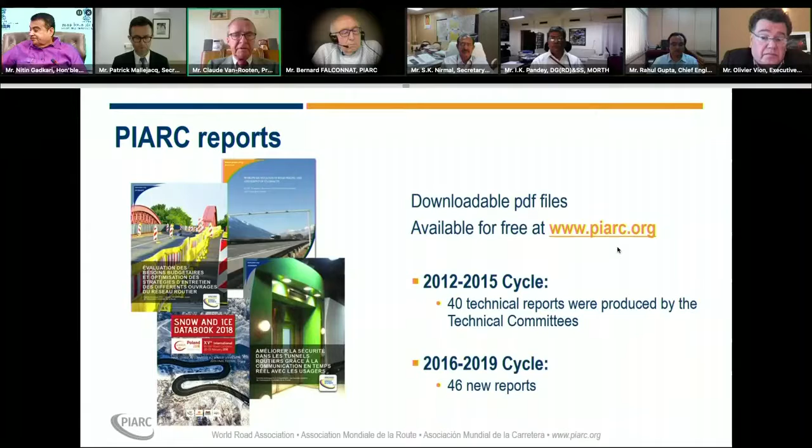We have reports of the past, and you see some of them here explained, 40 in one cycle, 46, and we are of course working on even more reports in the actual cycle. Next slide, please.

Important is, of course, to exchange and to have the possibility to present knowledge to the countries who want more. And that's why exchange of knowledge with and in low and middle income countries is quite important. We organized 22 seminars and 22 workshops in the former cycle. We have that all online on the website too. And of course, now we have some difficulties organizing them all in person, but webinars are a fantastic solution to go on with our knowledge exchange. Next slide, please.

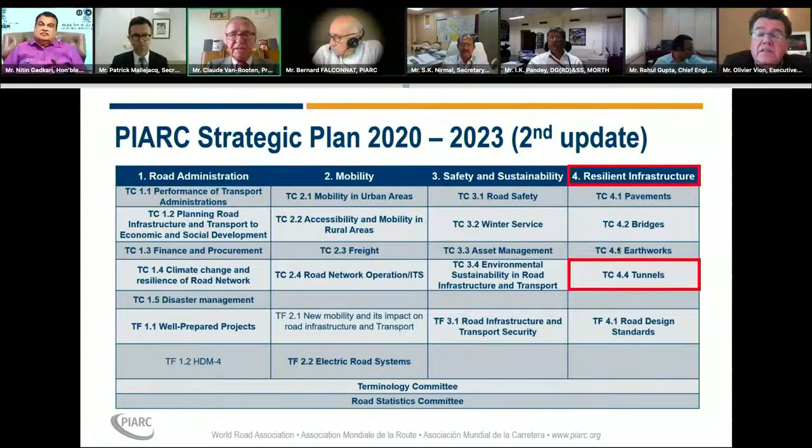We work based on a strategic plan after consultation of all our members and also partner organizations, because we try to have our work really focused on the most important topics for the whole world. And you see in the fourth column, the topic of today, tunnels. Next slide, please.

But of course, within that strategic plan, we have horizontal issues: climate change, resilience, road safety, innovation, and since one year, the pandemic of course. This is an issue where we have a response team quickly set up under the leadership of Patrick Mallejacq, working very hard about that. Next slide, please.

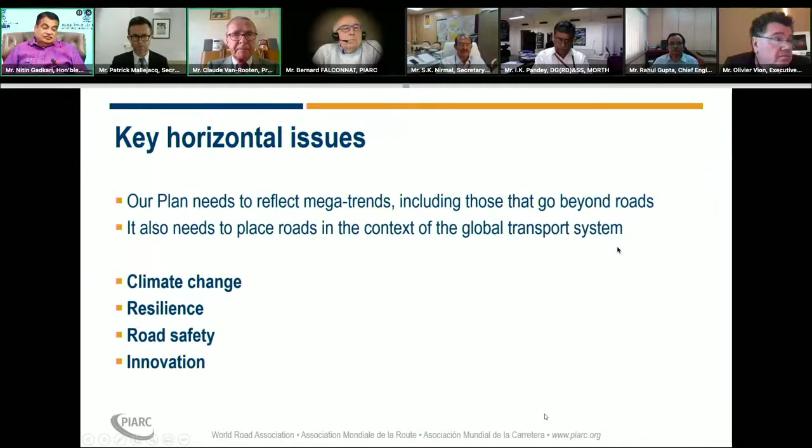Our work is led by Ingo Kaudinya about tunnel operation.

Merci, thank you. I don't know why the sound has been cut off. I am really sorry for that. I did not do that by myself. I hope you saw a minimum of information from the slides.

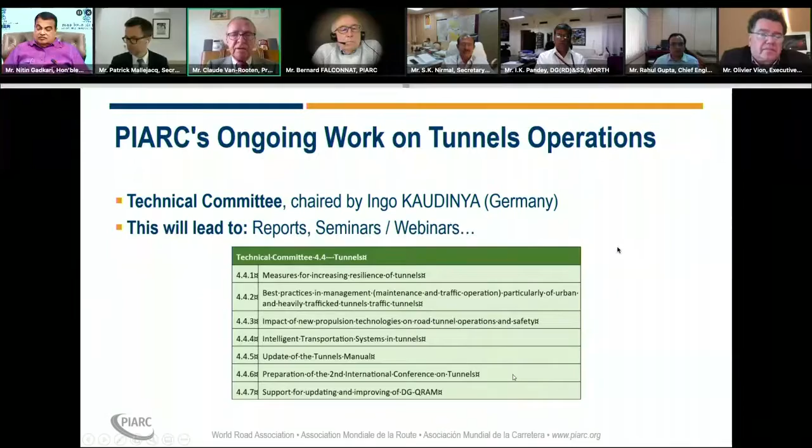Now I'm talking about the ongoing work on tunnel operations led by Ingo Kaudinya, who you are going to hear in the next sessions. Next slide, please.

Tunnels. The technical committee has 130 members from 40 countries. Not every country is a specialist in all the technical committees we have set up. The work is organized in committee meetings and 7 working groups and task forces, and I would like to thank them all for their tremendous continuous work about that. Next slide, please.

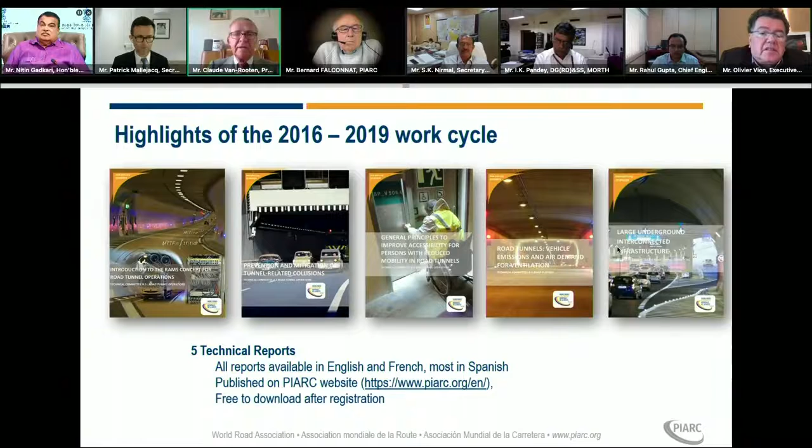Highlights of the last cycle. You can find all those reports again on our website, but it's important that you know it is almost a continuous work. Next slide, please.

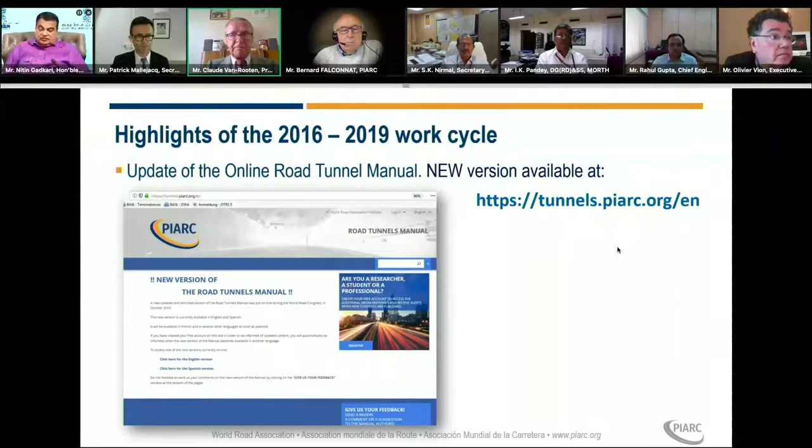Important also is the update on the online road tunnel manual. The new version is available on the website too. That online manual is a new method of presentation of our work that is very accessible and helps you go on your own timing and speed to have all the information about what is happening in the whole world. Next slide, please. I am concise to respect the timing, of course.

The next PIARC events: don't be afraid of the World Winter Service. I know that in India it's not so cold, however in the mountains probably well, but it's also the Road Resilience Congress. It will be virtual because we cannot organize it further, taking into account that many countries still in February will have limitations for traveling. But it doesn't prevent us from organizing a very important Congress. And in a certain sense, it gives more accessibility to many people from the whole world, for perhaps a cheaper price, because you don't need to travel to it.

We will have a second PIARC International Conference on Road Tunnel Operations and Safety in Granada in October 2022. And don't miss, of course, what we hope will be a real Congress in Prague in October 2023. Next slide, please.

India, as I said, was a founding member of PIARC in 1909. We have an esteemed member from India in our task forces on road design standards, and also on the Road Tunnels Committee. India is very welcome to appoint more experts in PIARC technical committees, to propose to host PIARC seminars locally as you do now, and so on.

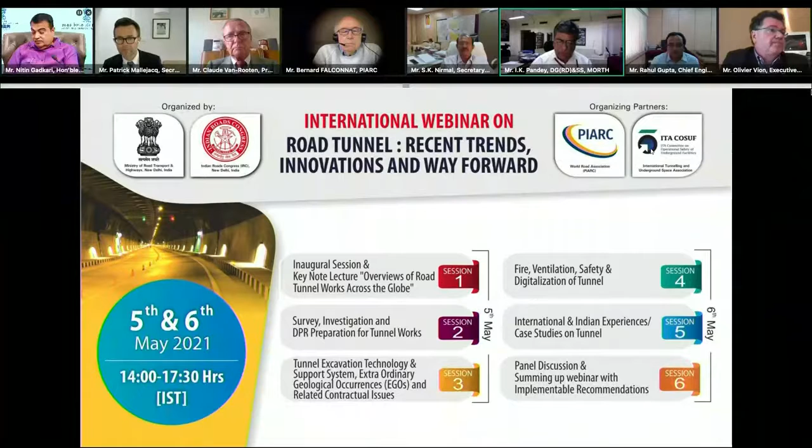I am really grateful to the Honorable Minister for gracing this occasion on the webinar on road tunnels, besides his busy schedule. I would also like to thank Indian Roads Congress, World Road Association, and International Tunnelling and Underground Space Association for coming together on this platform in organizing this international webinar on road tunnels, recent trends, innovations, and way forward.

Our ministry is mandated to develop a sustainable, safe, and reliable national highway infrastructure to achieve enhanced all-weather connectivity for fast-paced socio-economic development in the country. The construction of tunnels becomes imperative in mountainous areas where the surface transport network remains closed for a major period of the year due to snow, avalanche, etc.

Therefore, our ministry is focusing on development of tunnels on national highways in hilly and mountainous terrain for providing all-weather connectivity in inaccessible, remote, and strategic areas. I am grateful to our Honorable Minister, Road Transport and Highways, for directing us to specially create a separate tunnel zone in the ministry to address the problems being faced in tunnel projects in the country.

So the global output for tunnel and underground space construction, for the year 2019, is 125 billion euros, compared to 86 billion in 2016. That means growth of around 7 to 9% per year, which is 2 times more than global construction growth. So it's very important to show that tunneling is booming and that there are many, many projects all over the world.

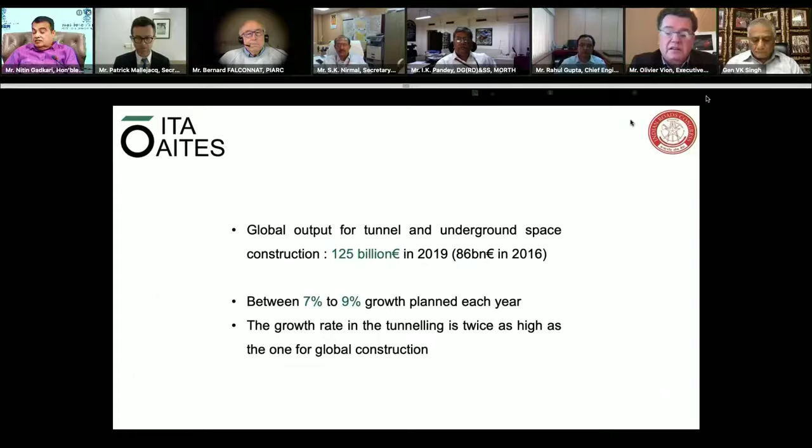If you see this graph, this is the tunnel construction by output in million euros. When I say Asia, I mean all Asian countries outside China, because China by itself is more or less 50% of all tunnels built in the world. So the figures show that Asia, China, and Europe are the big markets for tunneling. Then you have the Middle East, Australia, South America. So it shows anyhow that this is something very important.

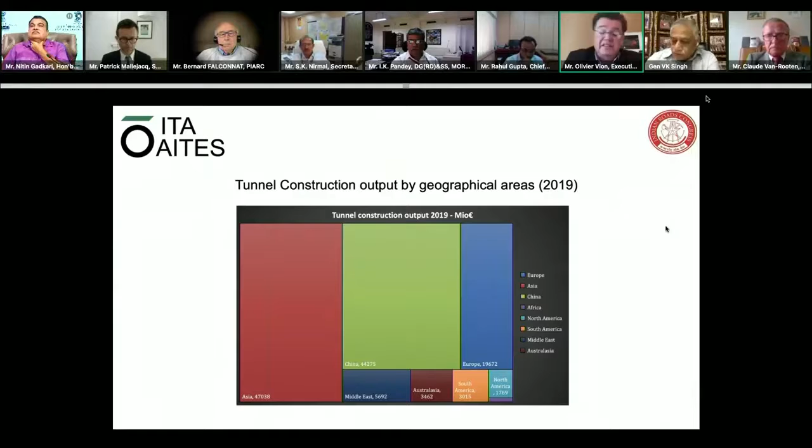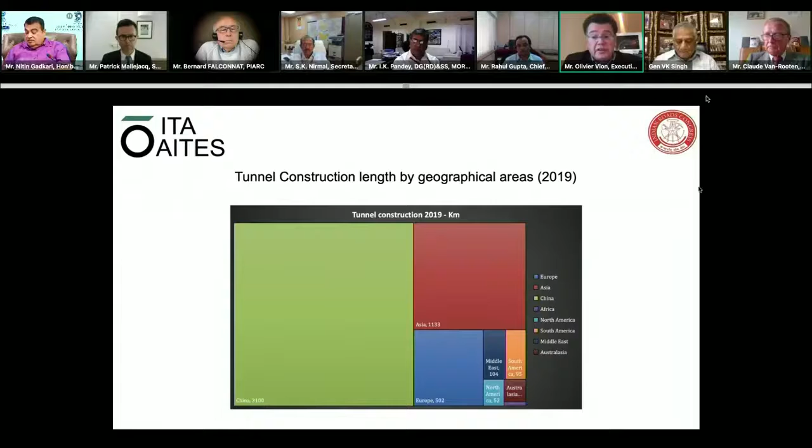Then in terms of kilometers, China is really the biggest, because of the 5,100 kilometers of tunnels that were in construction in 2019, 3,000 kilometers were being built in China, 1,000 in the rest of Asia, and 500 kilometers in Europe. So this is very important to be seen.

In Europe, for instance, you have Turkey, which is now the biggest market in Europe, followed by some countries with the same amount of tunnels, around 40 to 50 kilometers of tunnels excavated every year: Austria, Germany, Italy, Norway.

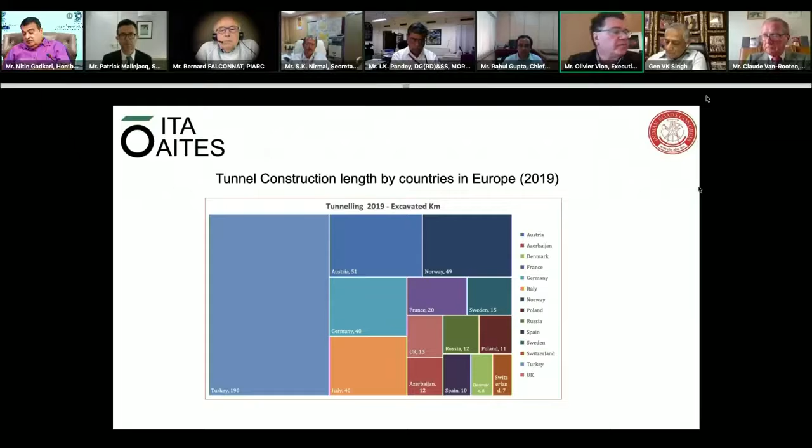Of course, the figure is different when you look at output versus kilometer, because not all tunnels have the same value. Mostly, road tunnels are per kilometer cheaper than metro tunnels, and therefore the countries building more road tunnels might be first in kilometer, but not first in output.

If I take Asia, in kilometers: China 3,000 kilometers of tunnels, Japan 800 kilometers, India 130 kilometers, and then other countries of Asia in kilometers of tunnels excavated during the year 2019. So these are the real kilometers excavated during 2019.

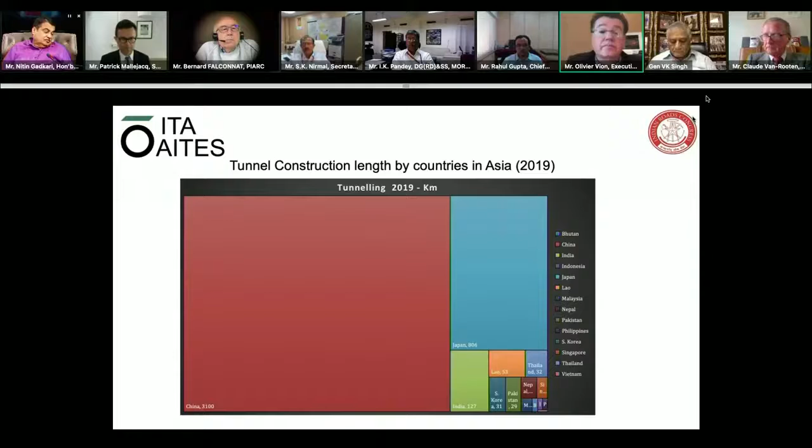As you see, the breakdown by use of tunnel is between metro, rail, road, and others. Road tunnels are the majority of the tunnels being built in the world.

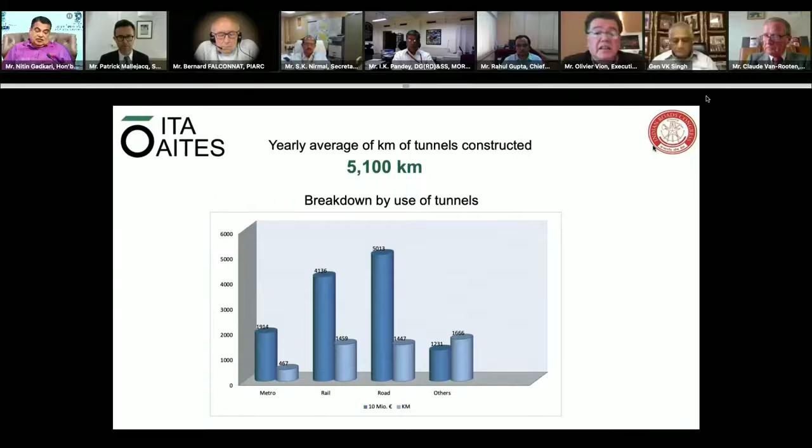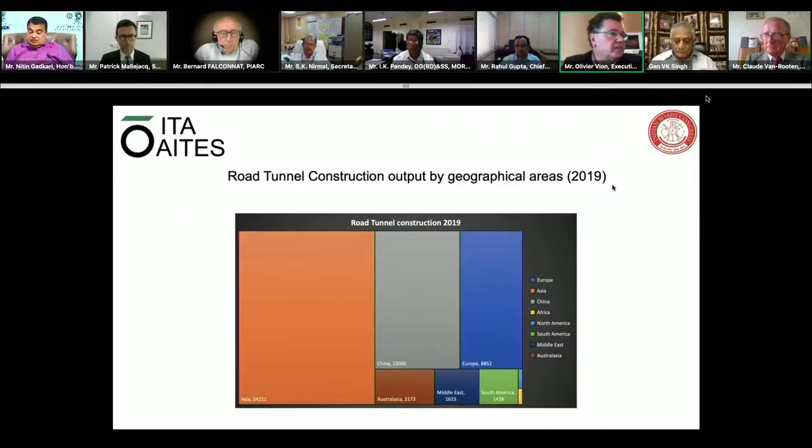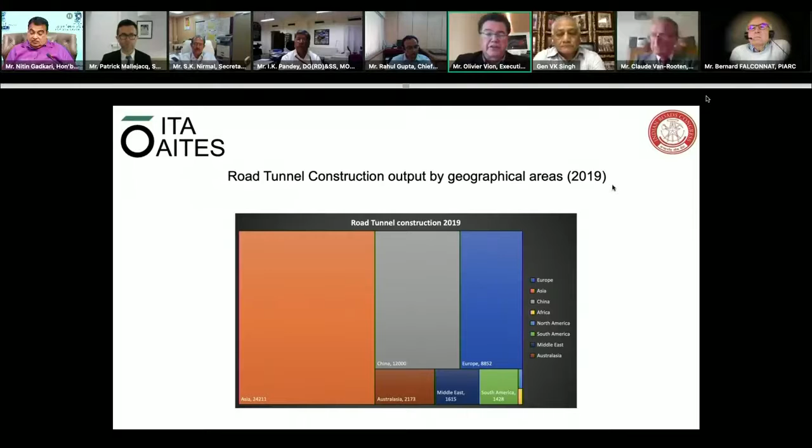If I go now more deeply on road tunnels, taking the same thing, China, Asia, Europe are first with 800 kilometers of road tunnel in China, 350 in Asia, and 225 in Europe. By output, Asia with 24 billion, China, Europe, Australasia. So the global market of tunnels, road tunnels or all tunnels, is dominated by China and Asia, which are growing countries with the most people demographically, meaning that the needs for tunnels and infrastructure are most important here, and it's good. They need to build infrastructure, and among the infrastructure being built, tunnels represent a great majority of projects.

That was a view of the reality of the year 2019. If we go now to projects in planning or study, we are more or less the same, even though the time frame between the start of planning of a tunnel and its completion is much longer in Europe than in other countries, specifically China. Sometimes when you ask Chinese authorities what their plans are, they can give you the plans for the next 3 years, which already represents a big amount, but they do not have longer term plans. For us in Europe, we have tunnels that have been in the planning phase for the last 25 years, for which construction has not started yet.

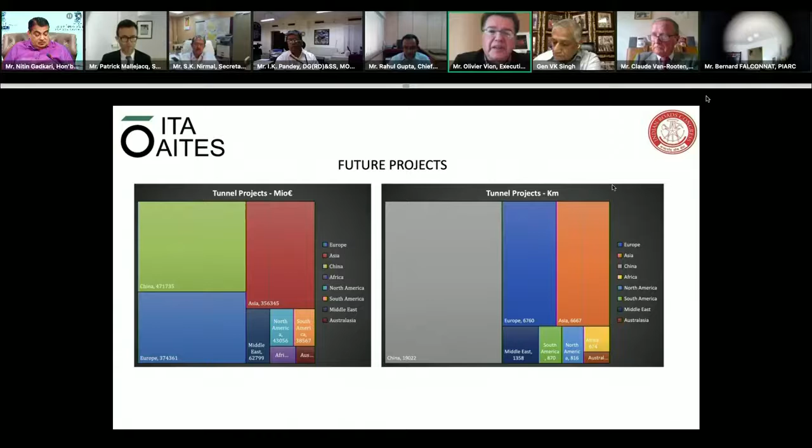So we have many tunnels in planning. That doesn't mean they will come in the next 5 years, whereas in Asian countries, specifically China, when you have a tunnel in a planning phase, that means that in the next 5 years it will be completed and commissioned. We sometimes would love to have this in Europe, but we have many other things to cope with, which unfortunately doesn't bring us to this figure.

It's the same, even though in the planning phase, probably because it takes longer to plan and the studies are longer, you have more rail tunnels in planning than road tunnels. Also because a rail tunnel means you are on a railway line, and a railway line can be operational only when it is finished. Sometimes with road tunnels, you have an existing road and you replace part of it with a tunnel to shorten the time, so you can act more quickly on road tunnels than on rail tunnels.

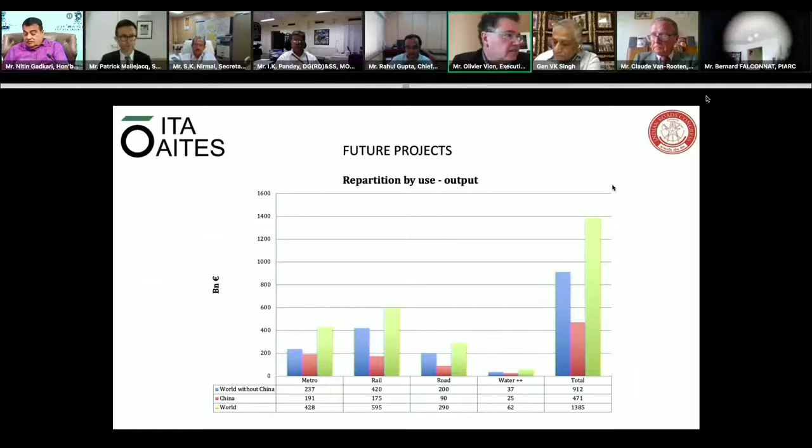Then I've tried to take some examples of road tunnel projects from the last years. You may know that the International Tunneling and Underground Space Association organizes awards every year - we will start the 7th edition this year - for the main projects, big projects, but also innovative projects. I've picked up some of the road tunnels that have been presented, either winners or finalists of these different awards, in order to show a variety of road tunnels being built in the world.

The first one is in Norway. As you know, the coast of Norway has a lot of fjords, but in the past you could go only by ferry, and they decided to build tunnels under the fjords, creating fixed links all along the coast. One of the big projects was the Ryfast tunnel, linking the city of Stavanger to the region of Ryfylke, with more than 50 kilometers of tunnels, including 40 kilometers of subsea tunnels.

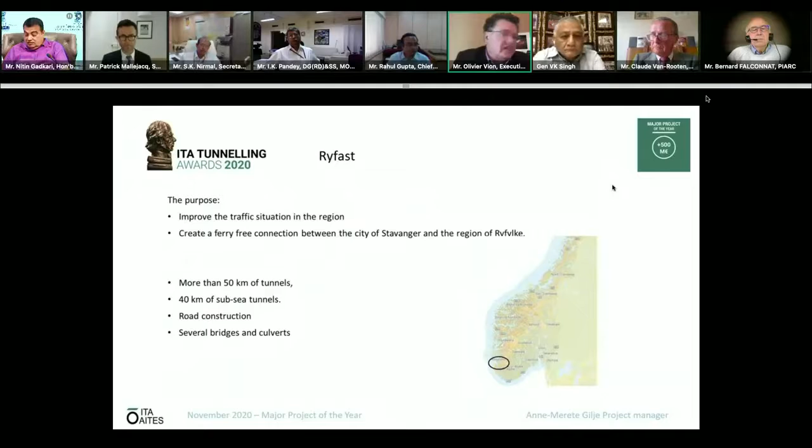I don't know if you see it well, but there are tunnels going all through there, with a tunnel going back on an island, and so on, sometimes with up to 6 deep tunnels. That's very impressive - to be able to build such a continuity of tunnels and undersea tunnels.

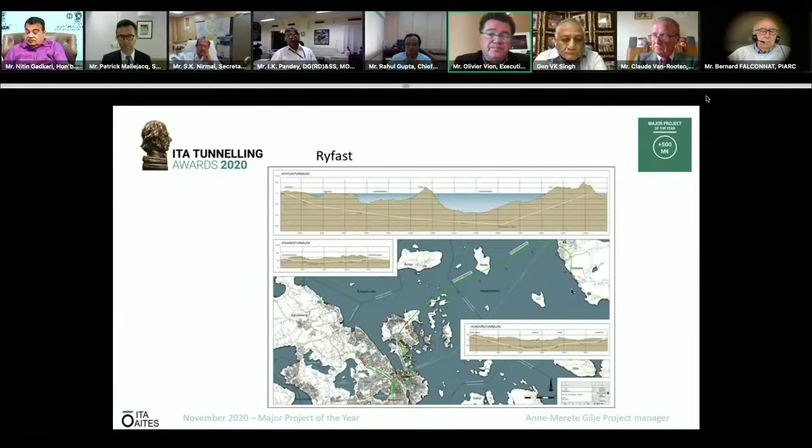It has been built by drill and blast with probe drilling and advanced drilling, because survey drillings made from boats, from the surface, are much more difficult to operate than when you are on land. So you need really advanced probe drilling and pre-grouting. Of course, you have something like 50-60 meters of water, so you need to be sure you are not going to have leakage, otherwise it's very difficult to cope with.

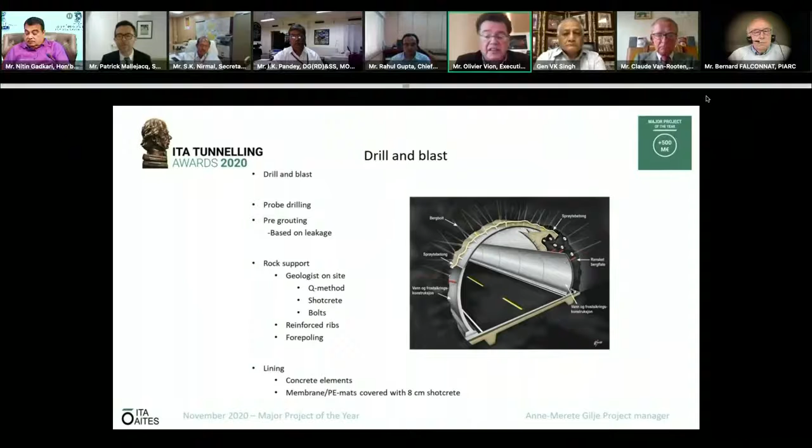Rock support with a geologist on site, shotcrete, bolts, reinforced ribs, fore-poling - so all along 40 kilometers of tunnels. Quite an impressive tunnel in Norway. But also in terms of operation, to break the monotony, they have made large caverns, sometimes bigger tunnels with changes of color, so that people do not fall asleep when driving in a 40-kilometer long tunnel under the sea.

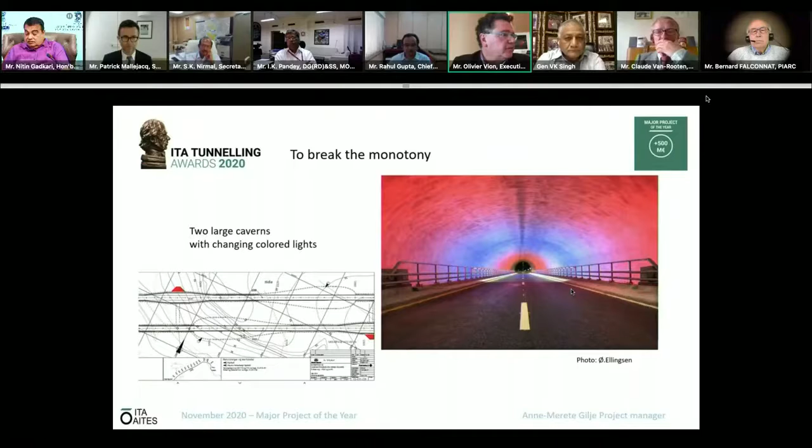So all the challenges along the way were, as I said, the weak zones, the low overburden, bad water leakage, and they also had difficulties not under the water but on other parts of the tunnels, and of course environment issues and local authorities in order to be able to build such a tunnel.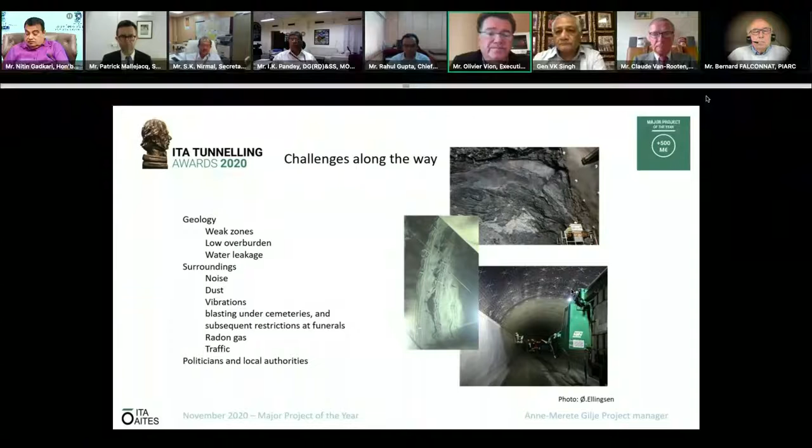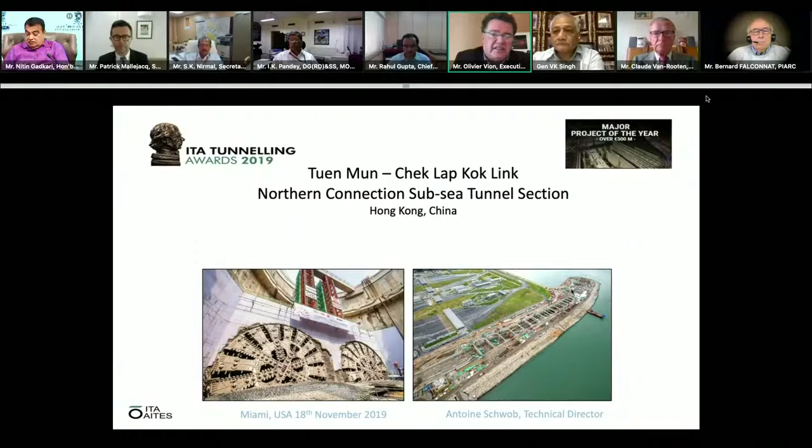Here I'm going closer to you in India. I'm going to Hong Kong, which is the Tuen Mun–Chek Lap Kok link tunnel, which is also an undersea tunnel, but this one is being built by TBM, nearly 5 kilometers, 2 tubes with a depth of 60 meters, and some cut and cover for the ramp, and 57 cross passages between the 2 tubes, 46 of them being built by tunneling methods.

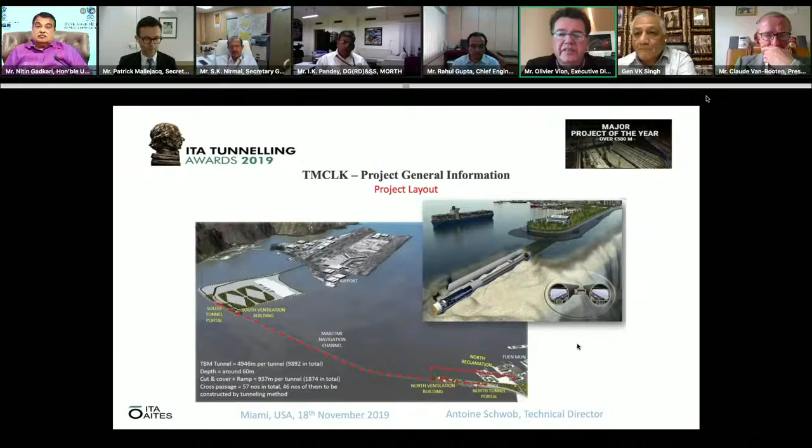It's been an Herrenknecht TBM slurry mixed shield TBM, 17.63 meters in diameter, so one of the biggest TBMs ever built, with a design pressure up to 7 bars. That's something impressive.

This shows that we are now able, in terms of construction - I would not say that we are able to build any kind of tunnel, because the easy tunnels have all been built. Now we have to cope with tunnels that are difficult to build, which always needs more innovation, more research and development.

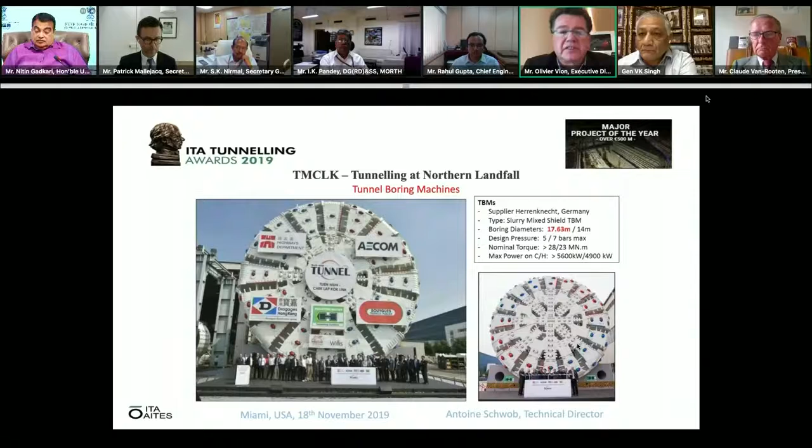One of the specificities of this tunnel was the fact that when building such tunnels with TBMs, you need to be able to change tools, and you're at up to 6 bars, so in hyperbaric conditions. That's been one of the main issues for this project: how people could go and repair frequently the tools in hyperbaric conditions up to 6 bars.

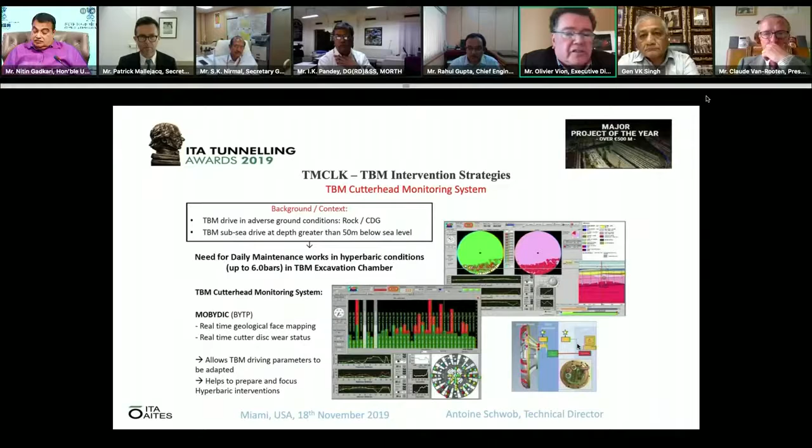So in fact they were staying for a longer cycle in a hyperbaric environment, meaning they were not going from normal atmosphere to 6 bars each time. They stayed at 6 bars atmosphere all the time, with long cycles up to 28 days. So they had built a specified habitat with pressurized living chambers on the surface in order to have people staying at this 6 bars atmosphere.

And of course they had to involve doctors, nurses, support technicians, just for the work of changing tools and operating in the hyperbaric environment of a TBM. You have 6 doctors, 3 nurses, 45 professional hyperbaric workers, 12 life support technicians, and 3 hyperbaric operation supervisors.

But in terms of efficiency, keeping everybody in the hyperbaric environment means less risk, because the risk is always in the decompression. So if you have less frequent decompression, it's much better for everybody. But you have to organize all your logistics specifically for all these people living for a longer period in hyperbaric conditions.

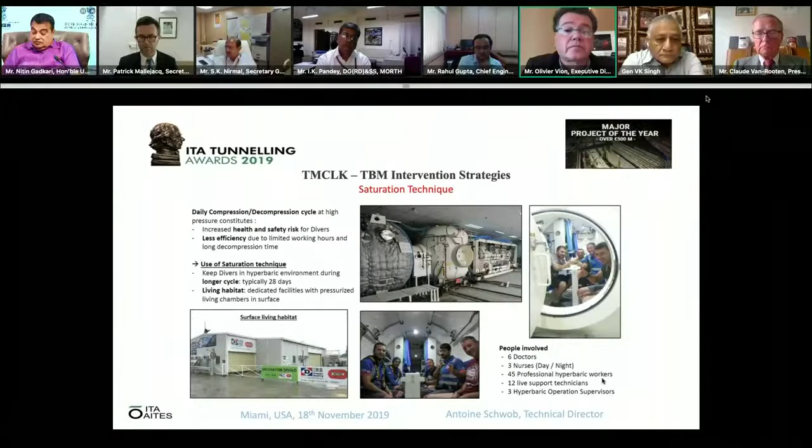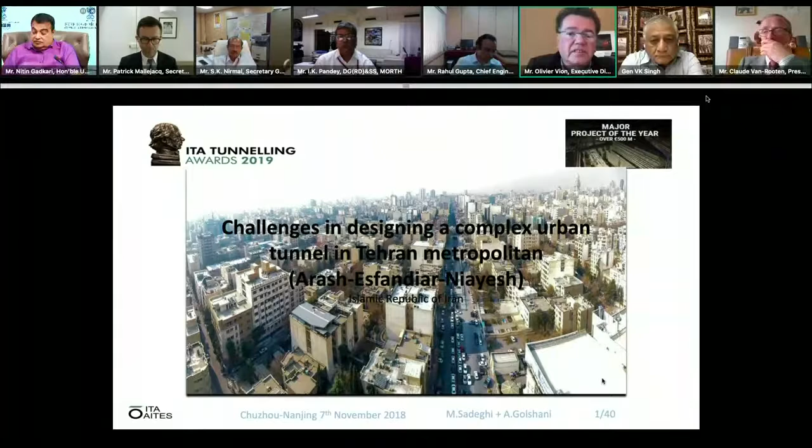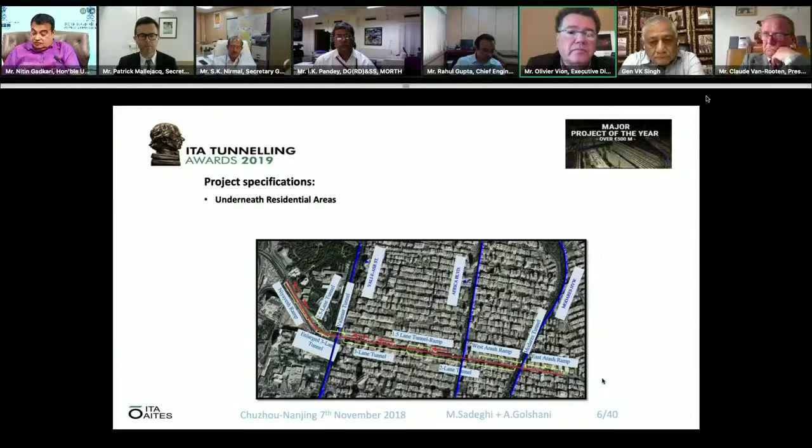Another interesting tunnel is a tunnel in Tehran. It's a shorter tunnel, but in a very dense urban area, underpassing vital arteries, with 3 emergency exits and also multiple cross sections. It is very impressive, this tunnel.

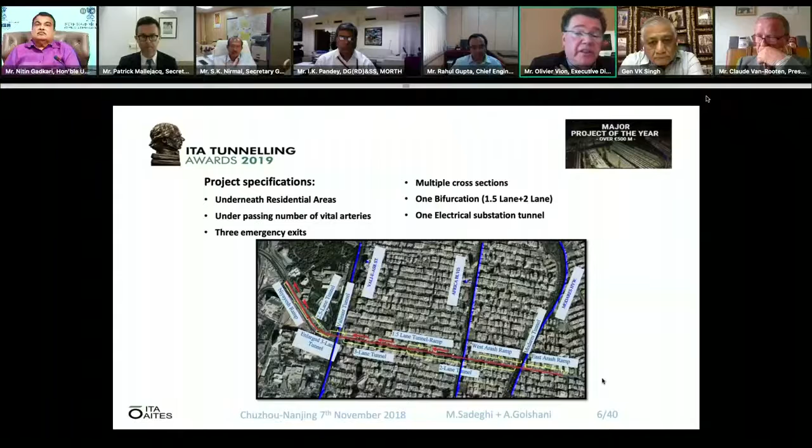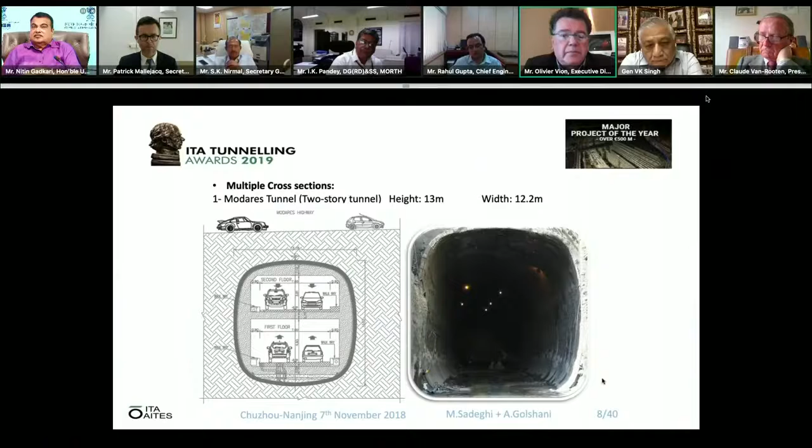So you have a cross section which is a 2-story tunnel, more or less square, 13 meters high by 12.2 meters wide, with 2 lanes in one direction on top and 2 lanes in the other direction below. But you also have a normal 2 traffic lane tunnel.

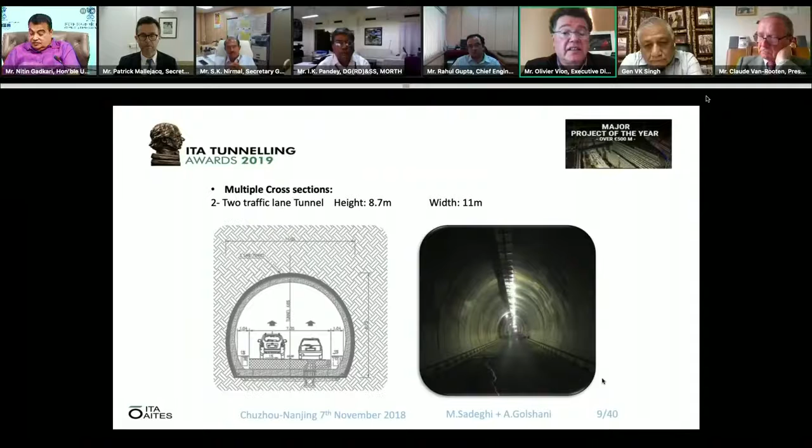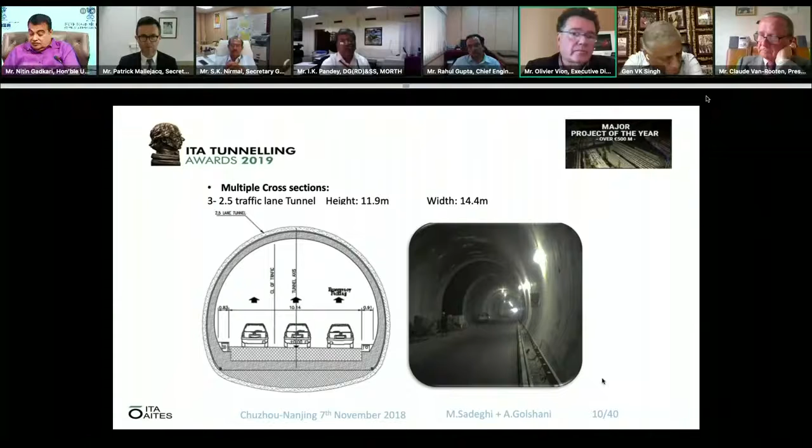For the same tunnel, these are just different parts. You have one section with what they call 2.5 traffic lanes, meaning one lane can be used as a traffic lane or not depending on the moment. And you have one with 1.5 traffic lanes.

So the issue in this operation is going from one section to the other, and of course this is quite impressive to build under a very dense area. But it is something needed, because in cities - and I will not even mention India, where you have very dense areas - for transport it is very important to use the underground to build road tunnels, but also for public transport, and to be adaptive so that you don't need 3 lanes along the whole length of your tunnel.

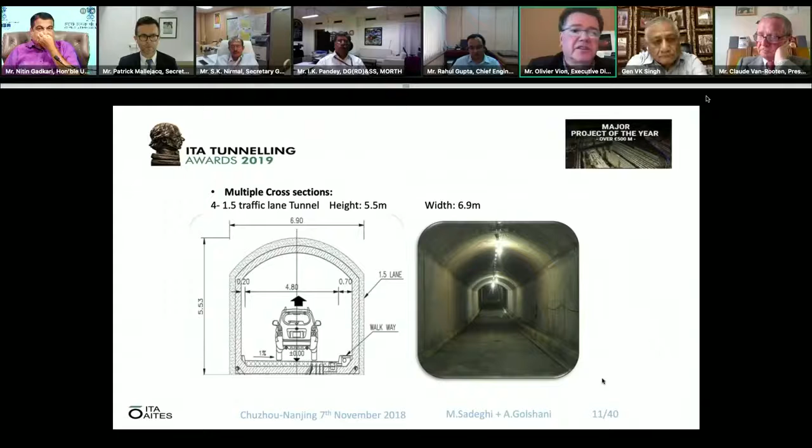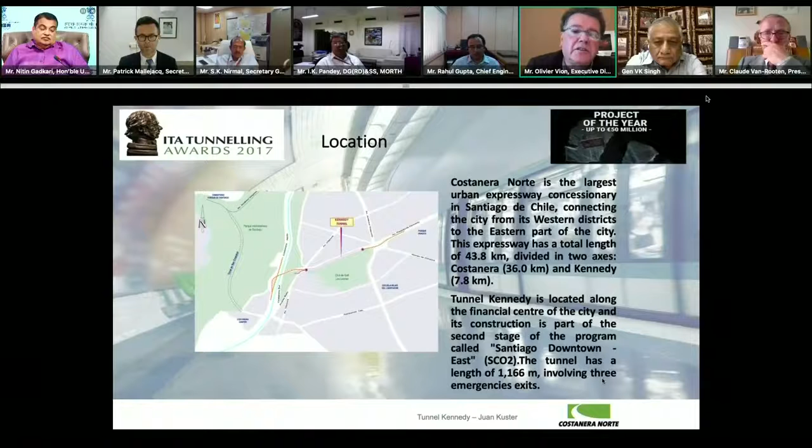You can modify your section of a tunnel depending on where you are. The last example I took is in Chile, the Costanera Norte with the Kennedy tunnel. It's a 1 kilometer tunnel in Santiago, with typical cross sections up to 4 or 5 lanes. So on 50 meters you have 5 lanes, meaning a section which is 21 meters wide and 12 meters high.

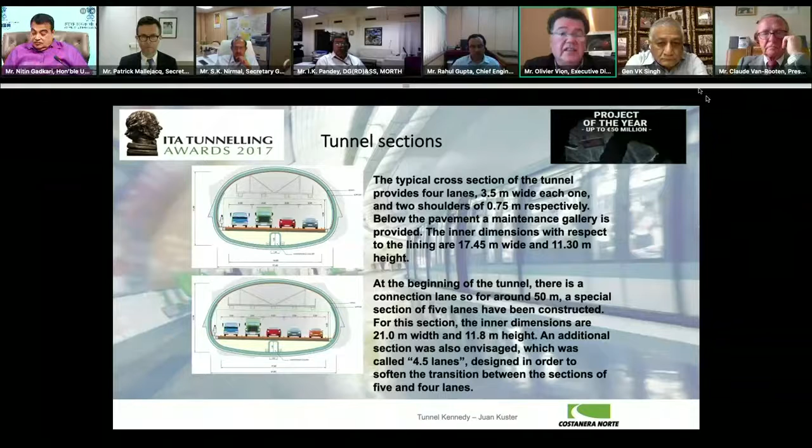It's also a 4.5 lane design, in order to handle very dense traffic, because 4 lanes are needed in each direction. As you see, that has been built with conventional methods, but it's very important because a 21 meter wide tunnel is huge, and 12 meters is a huge section. It's nearly 300 square meters in some parts, so it's very important to be able to build that safely.

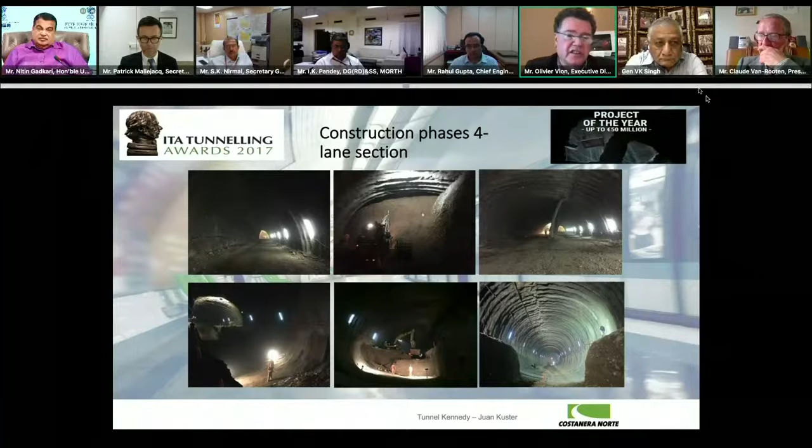And of course it has been made with different sections, with vault and then the invert and so on, with the tunnel lining and the waterproofing. So that was my overview of road tunnels over the world.

Of course, I am happy to answer questions from the floor, or from everywhere it could come from on this. And once again, I thank you everybody for having invited me to make this presentation.

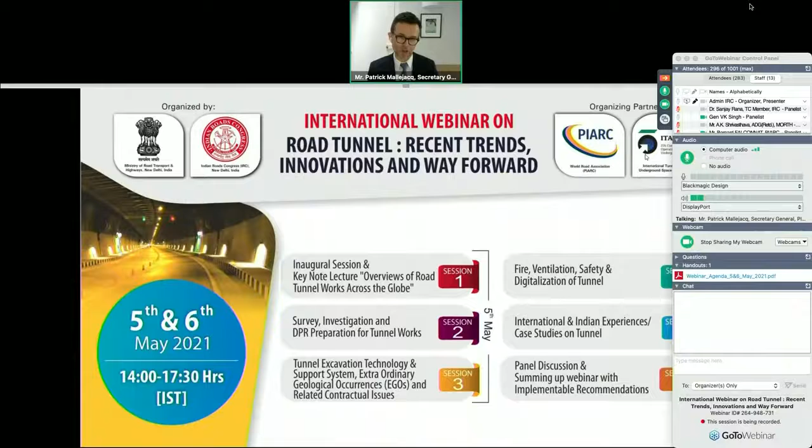I express our sincere thanks to Mr. Nirmal, Secretary General IRC, for his excellent efforts in organizing this webinar. I feel really privileged to be working with a person like Mr. Nirmal. I wish to thank all the friends from the media for covering this event, and I must mention our deep appreciation for everyone at the Indian Roads Congress, PIARC's Tunnel Committee, and the General Secretariat of PIARC for taking care of the organization of this excellent seminar.

Ladies and gentlemen, last but not least, I once again express my gratitude to all the speakers and experts who will be showcasing their expertise on various aspects of road tunnels over the next two days. We thank you all for being with us today in this inaugural session of the International Webinar on Road Tunnels, Recent Trends, Innovations, and Way Forward. Thank you very much to everyone.